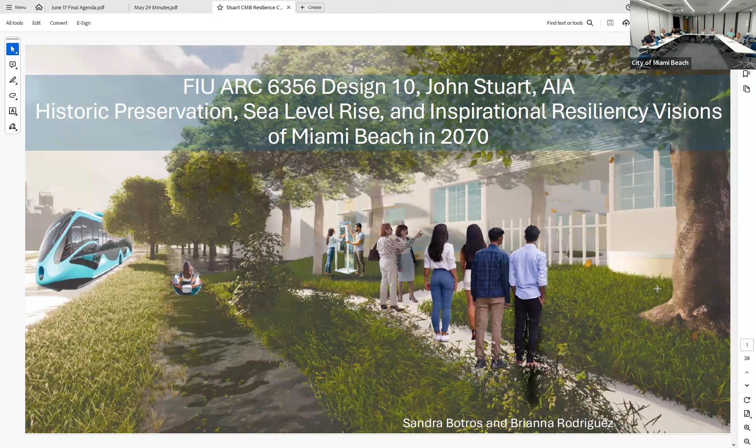We start with Debbie Tackett - I'll go through what we did last year. We look at a block, and one interesting thing is that we look at the social fabric of the historic block as part of its resiliency strategy, to understand exactly where people come from, why buildings were built, who was involved, and what else they've done, because we try to find patterns in these.

You can see these are each one of the students, they pick a building, and do it in pairs or individually, and then we get the whole block together.

Next please. We start by Debbie provides us with the building cards. This is information that's been scanned - these kind of stopped being created in this form in the 1970s. Each student gets the name of the architect, the name of the owner, the address, and all this information comes together.

What they're really tasked to do is find out how the owner and the architect met each other, how they met the contractor, how they worked on other projects together before, what things they've done. The idea is these are the DNA of resilience - understanding, in your own experience with your own dwelling, you probably remember who the plumber was, who fixed this, who did something else in your building. Good job or bad job, that's what we need to know.

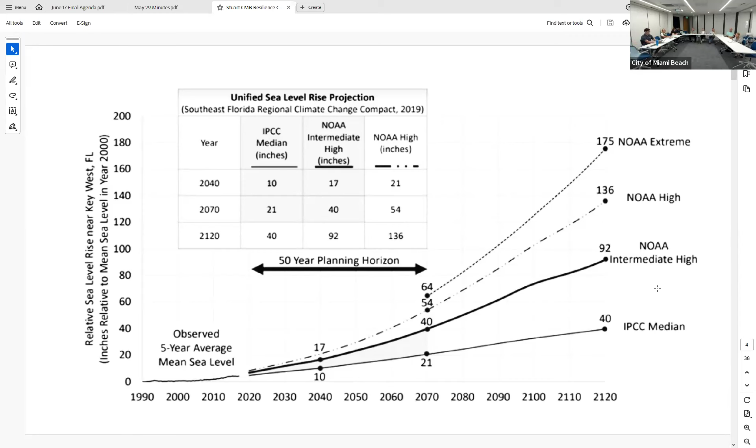Next please. Students have to understand where the mean high water mark is - this is very critical for us - versus, and we have to compare that line to where their ground level is. For architecture students, every architecture class starts with 0, wherever their ground is, whether on top of Mount Everest or at the bottom of Death Valley, it's always 0. And their building, if it's 4 stories tall, then it's always 48 feet or whatever, 50 feet.

But here we have to start thinking differently, and this is the first shift in this resiliency plan to get students to realize there is a datum against which we have to measure a moving target, which is the tide - a constantly moving target - and the height of your building. So let's go to the next.

They study the freeboard ordinance, which helps them understand this - it was recently redone. They look at this, next.

They look at this Miami Beach adaptation calculator, which shows them exactly how high the ground is. In this particular building, this was 2.4 - this ground is at 2.4 in NAVD, and if you remember, the mean higher high water is 0.33. So they have to understand they have about 2 feet to work with there, and that's not a lot. If that goes up and rain comes down, you quickly fill up like we did the other day.

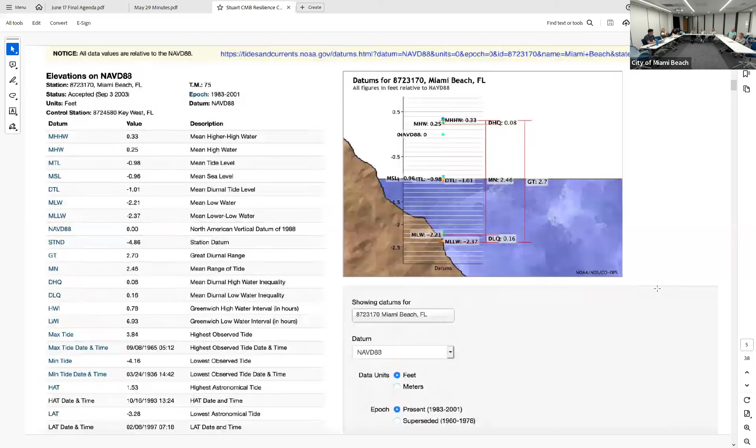But base flood, you're talking about the FEMA requirements for new builds. So if you think about it, if we flood at about 1.7, 1.8, and FEMA's requiring 8 to 9 feet, that's how high new property should be. So that's the difference. Make sense?

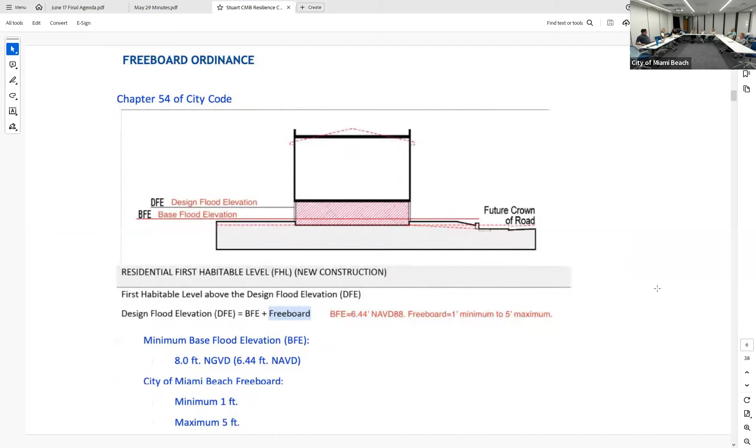And that calculator you were talking about, does that give you your numbers? That's all in NAVD, and there's a lot of properties the city has information for. So they may say, we've got Ron's house, you can plug in your address, you can find his house. You can see what your finished floor is in relationship to the current and future plans of the roads. So you can see, are you higher, are you lower? What is that relationship? It'll give you the actual difference.

I'm gonna take this class. Well, it's confusing. It is, it's incredibly confusing for architecture students too, who are used to it. Confusing for everyone, absolutely everyone. There's too many moving parts, and it's pretty abstract. These are datum that can shift, like, okay.

Well, the datum, the zero, absolute zero won't shift, but there is work being done on a new datum which I think is going to be higher, where the zero will be a little higher than in NAVD 88. So in 1929 there was a datum first made, and that was a little lower, that's NGVD, and then in 1988 there was a second datum, a little higher, and now there's talk about a new, much more specific datum based on satellite imagery and data and stuff like this.

Anyway, the class can go in many different directions. We have people studying which ships people came through to Ellis Island on, and how they made their money in the Lower East Side to buy the building here in South Beach as a single mom, as one of the only places that, and how they had the cash to, because women couldn't have mortgages at the time.

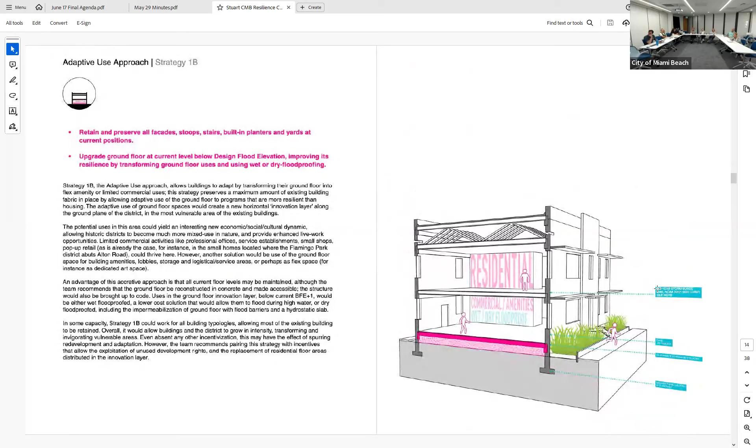Let's go to the next one. Alan provides different strategies — his talk is like an hour and a half just on this. One example is raising a floor, changing a residential use in a multifamily building to commercial and residential, which is often one of the interests of the students.

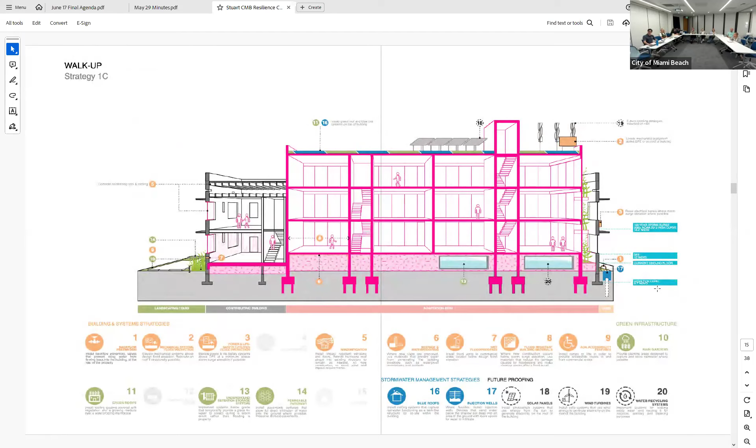He also helps give a list of all the strategies you can have on the rooftop, from wind to cisterns below, to keeping a historic part of the building and adding new construction while keeping a historic part in back — just one possible strategy of many.

He looks at these as incentivization opportunities, which is very important for students to understand. You can't just ask somebody to pay a lot of money for something on their building without giving them any opportunity to earn money from that. We talk about this a bit with the students.

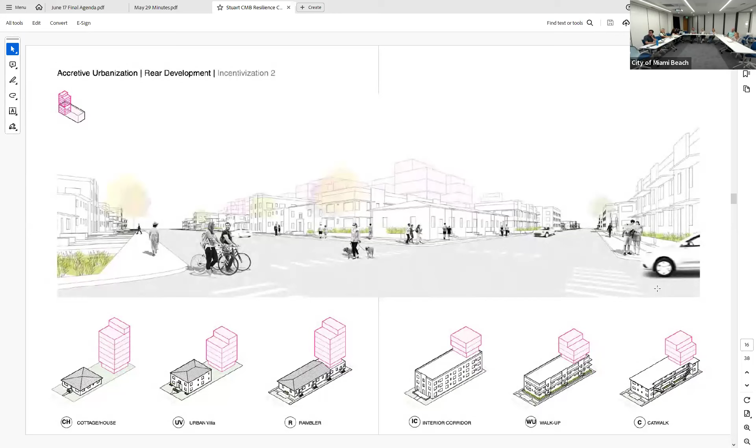I asked them about their car — what if somebody just told you that you had to put solar panels on your car, no choice, you just have to do it? It's a thought exercise. They ask: first, why? Then, understanding resilience, second, how much does it cost? What will it do to my car? Will it change the resale value? All these questions — and I tell them, those are exactly the questions you'll be asked if you ask any building owner to do something like this. That exercise brings it home in a much more concrete way.

This year — we haven't done this yet — thanks to Aris's excellent work, we're going to introduce a Building Resilience Index. Students will propose and understand how each of their activities contributes to the resilience of the building, which the index helps measure. It's a new thing we're excited to try, and it's focused more on natural disasters rather than whether it's a high tide, a medium-high tide, or whatever.

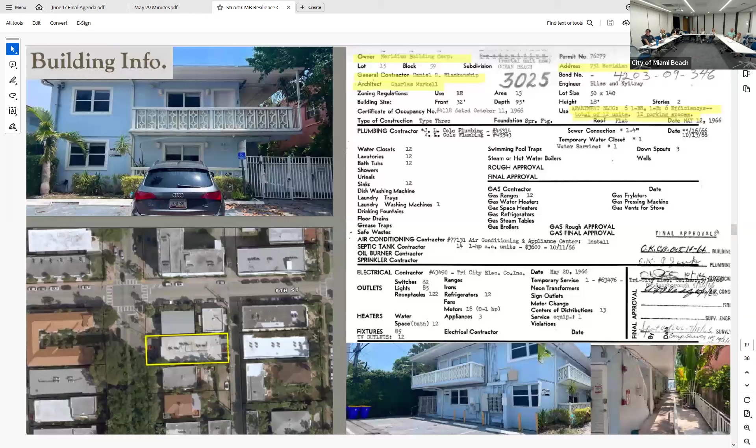So let's take Shannon's example, 751 Meridian Avenue — this is her presentation. I'm showing you her slides because I want to show you what a student in the class does. First she gets her building, a 1960s building, looks at it, and researches who the architect and contractor were.

She draws the building, since historic buildings are all documented — and sometimes she has to guess, because you can't always walk into these buildings to draw and survey them — and puts them up. She studies them, their elements and their attributes.

Question: for the interior of the building, is she also using stuff posted online, like apartment rental listings? Yes, she is.

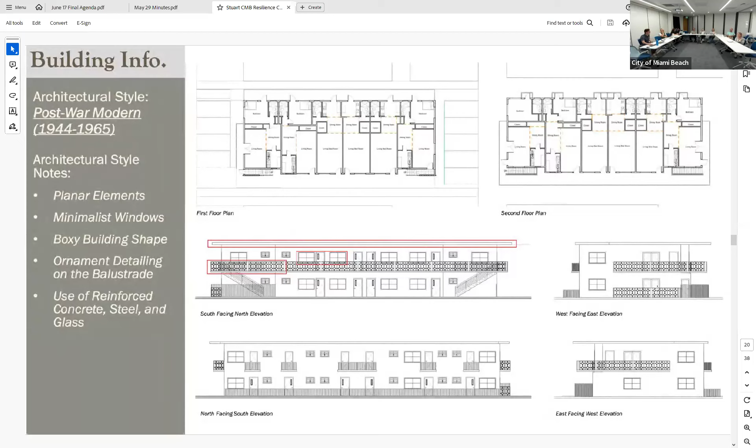Each student becomes a stalker par excellence. One time, for Galen's apartment, the student ended up meeting him — she studied his building and he talked to her. That was a couple of years ago. Then she builds a three-dimensional model to understand how it fits into the community.

Then starting to study who the architect is. In her case, this is a 60s architect, and it's so interesting because she goes back to the Sanborn maps and looks for the original buildings on the site, because before the 60s building there were a couple of cottages, a bungalow and a cottage on there.

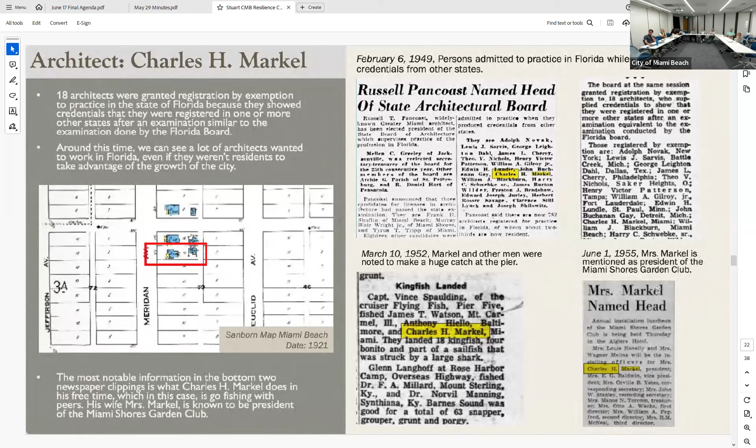She realizes Charles Markel is the architect. Markel does other buildings in the city and in our area, and loses his license. So they study everything - they study murders, marriages, music lessons, all these things that come together.

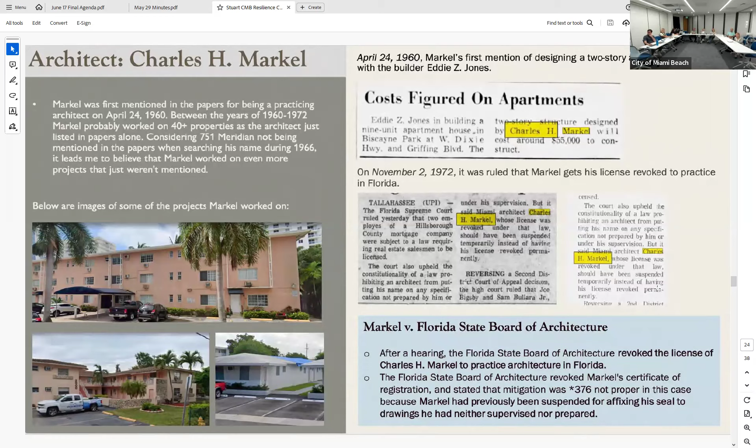But we were trying to find buildings and find all of their characters. He's working with a contractor, Daniel Blankenship, this is one of his last buildings before he moved up to Nova Scotia and became permanently involved with Oak Island, the treasure of Oak Island, which you may have heard about.

There are all these people searching for it. They think they found it. They dig and whatever.

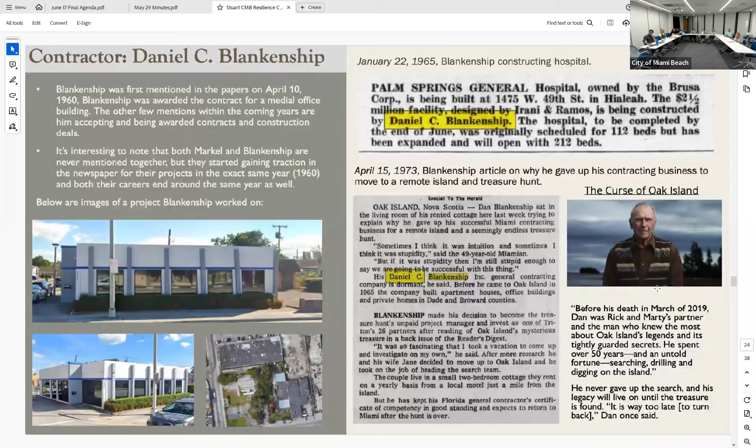But I want the students to realize that these buildings, their lives are the lives of people involved with the buildings, and just as today, all of us in this room form part of what this building's life is, each of our lives coming together here. So there's kind of that philosophical overlay.

They look at people who were living here. So the building was a strictly Jewish private home in the 30s, and then later when it's sold. These are just some examples of looking at people selling furniture, people renting apartments, how they describe the building - using newspapers.com and ancestry.com.

I should say this is unusual because universities don't subscribe to this. You can't go to FIU's library and log in to look at your ancestry - they just don't subscribe. But Ancestry is one of the most important places to find ship manifests, to find how people are related to one another.

And when they get married, because they're looking at why architects are here, why is Markel here, how did he meet - she didn't actually figure out exactly how he met Blankenship, but anyway.

So then they go up to the present, looking at listings at LinkedIn, and she found in this case that this was a short-term rental. So she keeps going - she emailed the guy who was running the short-term rental, and he emails her back and tells her that they're the NNN tenants.

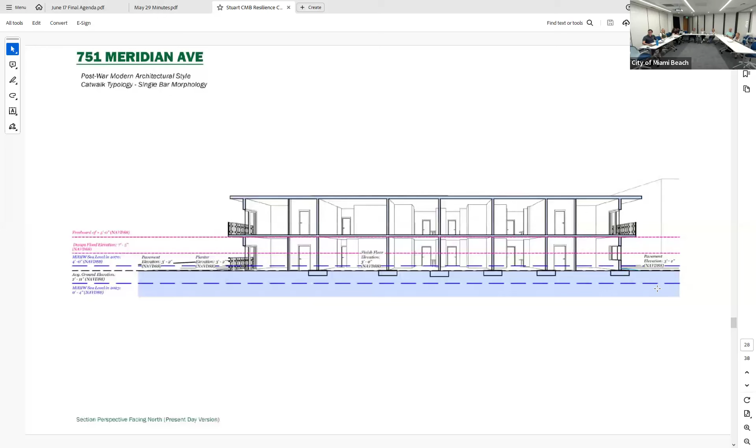And then proposes this redesign in large part because it's not a contributing building at the moment, but still she was interested in some of the aspects of it and the way it was open and created a courtyard in the middle.

And notice she also made a fresh market and a planter storage, which I believe - I think they kind of grow food, and we often look at the way blocks can become places of resilience for communities. So a block can be a storage area for food, it can also be a shelter in place, or it can have an energy storage area.

Quick question - did they also look at all the kind of green possible solutions that can go into it? Yeah, so that's what these are.

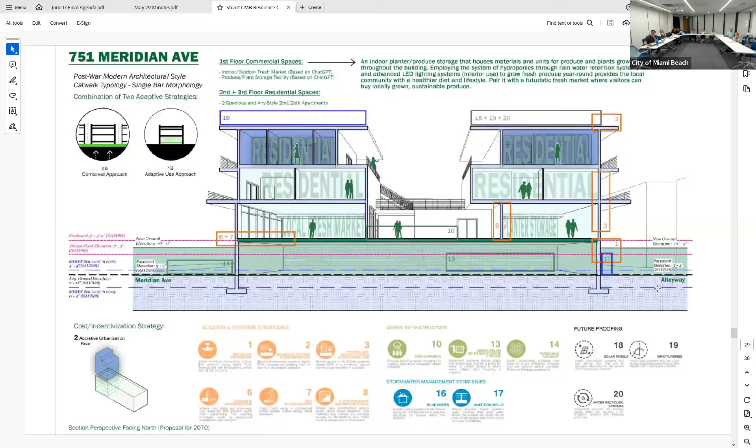These are following the model, looking at what has been suggested there. Underground storage, permeable pavement, rain gardens, injection wells, blue roofs where the water's kept on the roof, things like that. What about green roofs? Yes, green roofs. Blue roofs where rainwater is kept, stored, and filtered.

As a follow-up, if people decide to do a green roof, how does that affect their insurance? It seems like it would affect the rates. They would cancel the policy. Yes, and that's definitely a possibility.

When students think about these narratives, they also think about how insurance would have to work, and what the benefits would be to the owner. Because if it's just a burden, why would you load your roof with water or plants? Those questions lead to policy questions about what we're really trying to do. Somebody could pick this apart for all those policy questions, like putting a cistern down here wouldn't be allowed, putting any retail on the first floor wouldn't be allowed, and things like that in the current environment.

This is where Commissioner Samuel and I were talking about how images, and it's not even this, is more technical for the architecture student, but this is to get them to make sure they're checking these boxes. Maybe we can go to the next image.

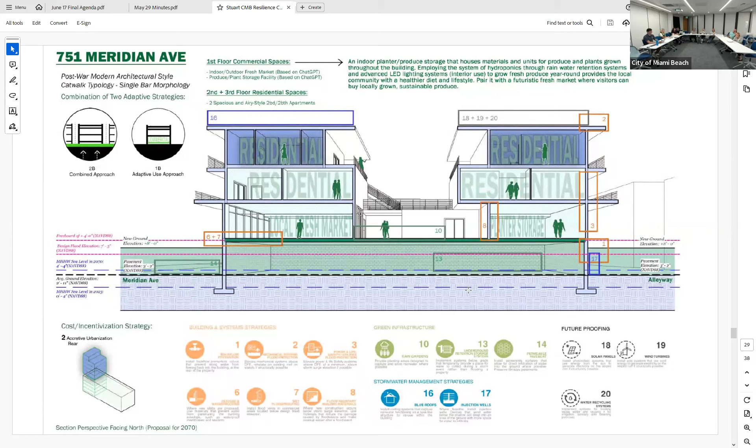So then she starts to present these drawings for this particular project, and you can see the blue infrastructure we were talking about, the cisterns on the roof that would filter down. Next.

One of the things we do is use AI, usually ChatGPT, to be our client. Each student has their own client, and they say, suppose you live at 751 Meridian Avenue, this is the history, and they give it the whole history. Who lives there in 2070, where do they come from, what do they need, what's their family history, what's happening in the building, and they have a kind of relationship with this client.

Our students, and students in general of architecture, are really bad at being clients. They're not trained to be clients. If they were trained to be clients, they'd be in business school. They're trained to respond to client needs. So this is a good way to do this.

So we use AI, and in this case, this is one of the reasons why I showed this, she also used AI because she wasn't able to find online diverse people she thought would be living here in the future, images of them doing something she thought they might be doing. So she used DALL-E and AI to create images of people doing things, and then put them into this environment. You just can't go online and find an image of a Black couple holding a basket of fruit - you're not going to find it. But if that's what you need to show your idea for your building, AI will create it for you, and that's what she did.

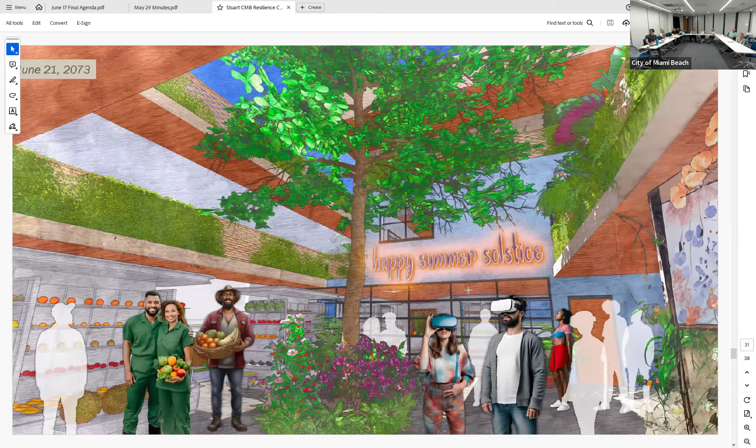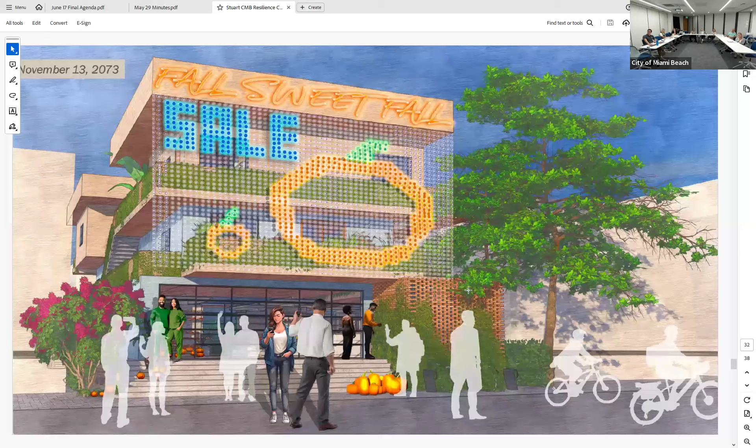So she's looking at a completely different idea of what the street frontage would be like. If you notice, she did a little switcheroo from the section - she has a stair going up to show the whole building was raised, the first floor raised to freeboard. Then these are more images made with AI, and the students are all drone obsessed - there's always a drone in 2070. It's going to be like you need a drone swatter instead of a fly swatter just to get them out of your space.

Anyway, next - this was just showing one student's work, and that was the end. Go back one. So this is the end of her project, and you can see her design style and drawing technique. Go to the next.

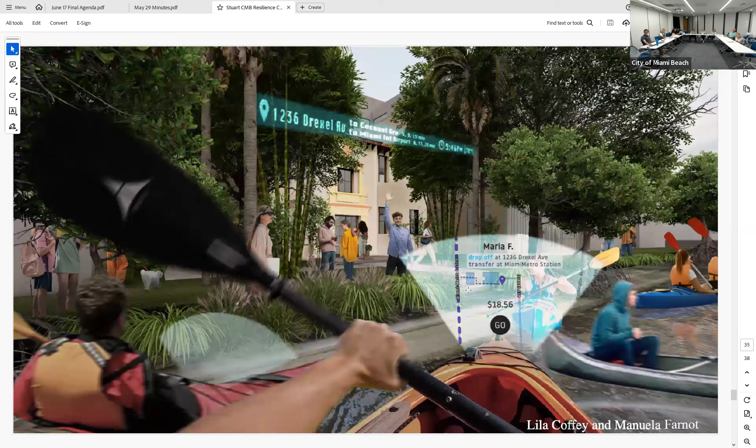What? It looked like my street. Yeah, it looked like I was just in there, I know, except I was in a car, a very low car.

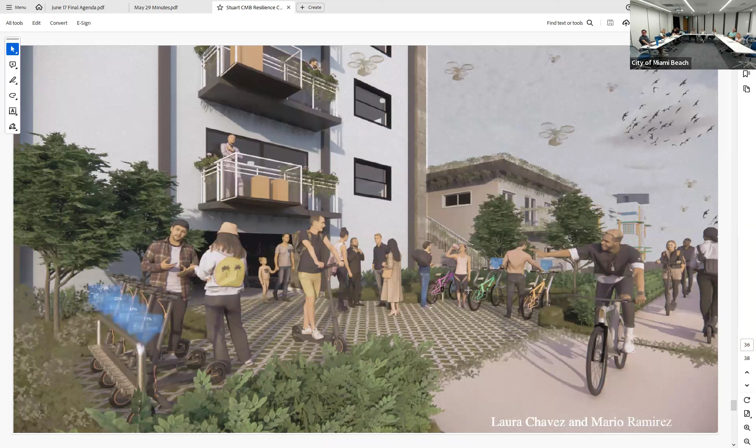This was obviously showing the kinds of transportation, permeable pavement, a kind of greenness, and drones everywhere. I think this might be the last one, showing one of the alleys being used as a connection to get to buildings, and the historic building has some green on it. Is there one more?

Sorry. Oh, and the last thing I was going to say is that this whole thing with AI has led to a research project in which we're trying to train an AI tool. I'm working with Debbie on this, and a professor of data science at FIU, to train AI to read the building cards and make connections between buildings, because there are too many to know, but to read it and find patterns and help.

The idea is that because this is such big data, there are over 10,000 of these cards, and thousands of buildings were built after the cards were discontinued, and that data should be in there too. So the idea is that this city could have this tool to understand its built environment for private residents, to know more about what's happening.

For example, if you want to replace your windows, you should be able to go to this tool and say, a little bit like Amazon, okay, I'm interested in windows, this is where I live. And it should say, this was built the same year by the same architect as these other buildings, and they've changed their windows, or these two need to be changed.